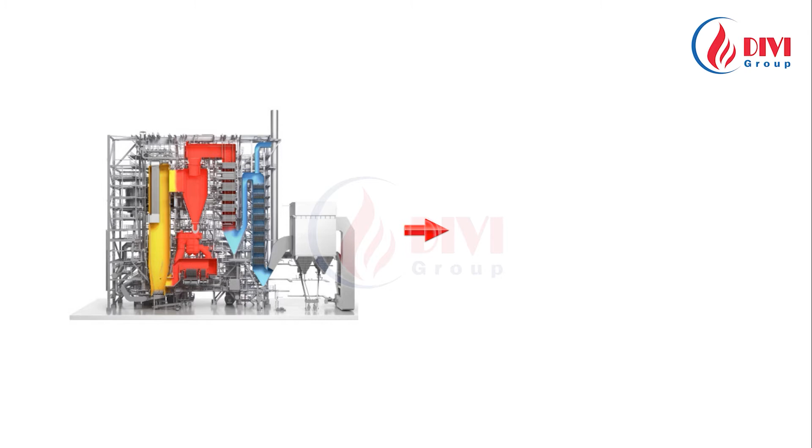Therefore, choosing the right fuel and appropriate combustion technology will help us not only optimize the cost of steam production, but also ensure environmental standards. Peace of mind for production. About the former, we'll talk about choosing the right fuel in Vietnam.

In Vietnam, there are many popular fuels, such as diesel oil, gas, coal. These are fuels that you can easily find anywhere in Vietnam, but they are classified as high-cost fuels in Vietnam. As we all know, up to 3/4 of Vietnam's territory is mountainous, stretching from the north to the south, and a very large part of the area is currently being planted with industrial crops such as rubber trees, indigo trees, eucalyptus trees. The main purpose is to supply wood for the wood processing industry.

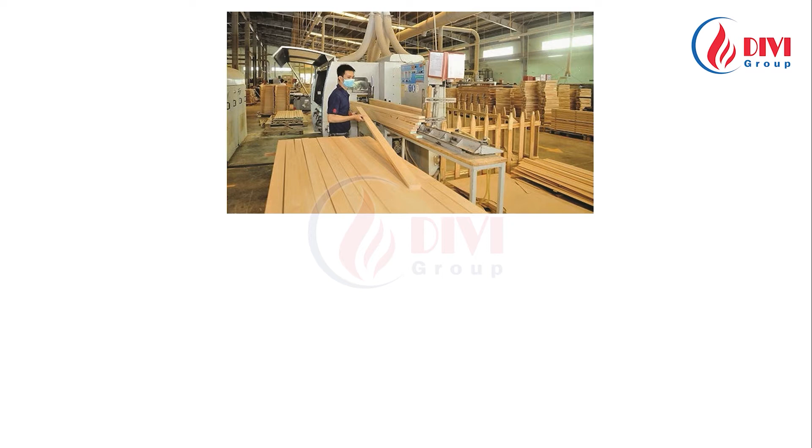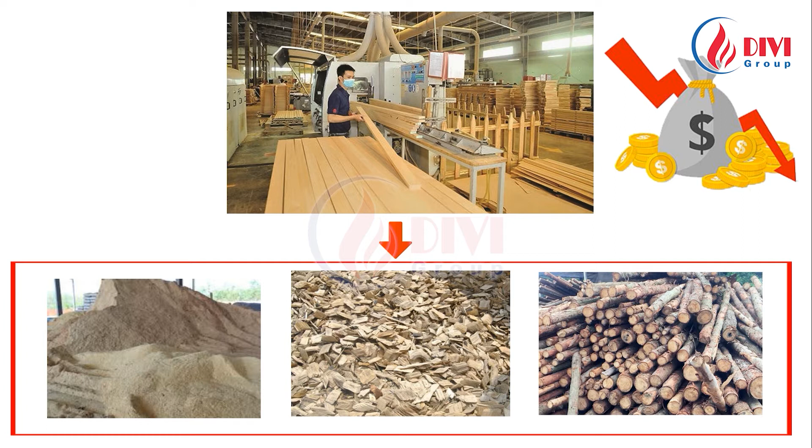Therefore, there are various types of waste products from this wood processing industry, such as sawdust, chopped wood chips, tree branches. Currently, the supply of these three fuels mentioned above is very cheap and easy to buy in all regions. Moreover, in Vietnam, some regions also have their own specific fuels as follows.

For the western region, including 13 provinces, the supply of crushed rice husks, rice husk firewood, and rice husk pellets is abundant, but the price varies by season. In the western provinces, it is possible to use a backup fuel source, which is imported coal from Indonesia, which is also quite cheap, and you can use it at times when the price of rice husk fuel is high.

For the south, including Ho Chi Minh, Dong Nai, Binh Duong, Binh Phuoc, Tay Ninh, Ba Ria Vung Tau, Binh Thuan, there are many fuel sources with very large output and very cheap prices as follows: chopped wood chips, sawdust, crushed rice husk, cashew nut residue, firewood, rice husk firewood, and coal fuel imported from Indonesia.

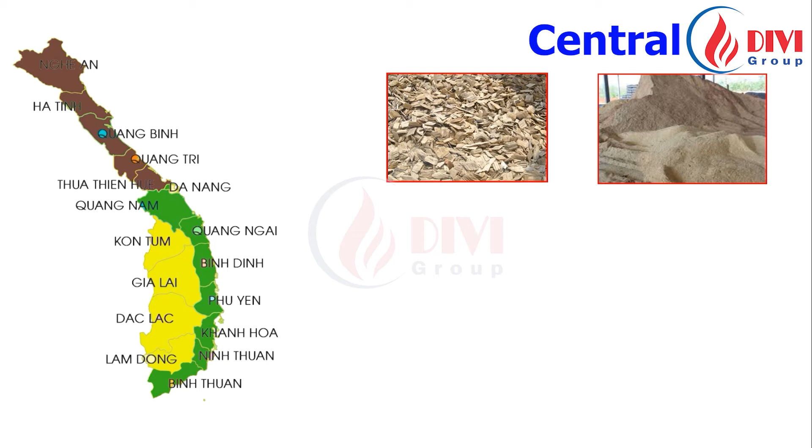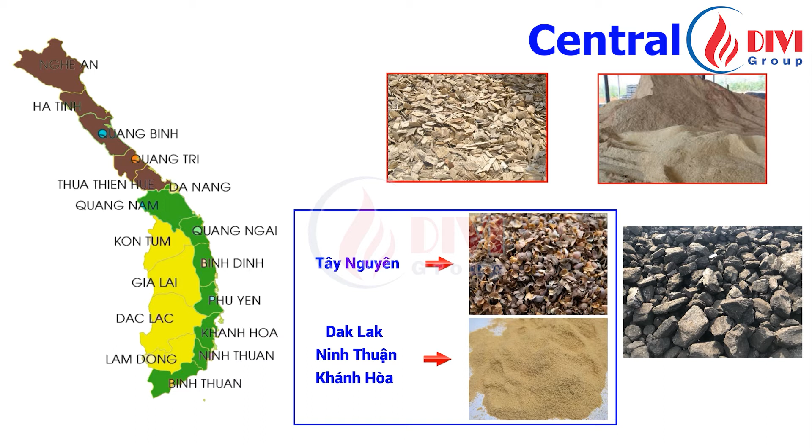For the central region, the fuel sources of chopped wood chips and sawdust are the two main fuels with abundant reserves and low unit prices. There are also some typical fuel types as follows. The Central Highlands region has an additional fuel source, which is coffee husks. Dak Lak, Ninh Thuan, and Khanh Hoa have crushed rice husks as other fuel sources. In the central region, there are sources of coal fuel imported from Indonesia that are transported from ports in the southern region, but they have a slightly higher cost than the southern region.

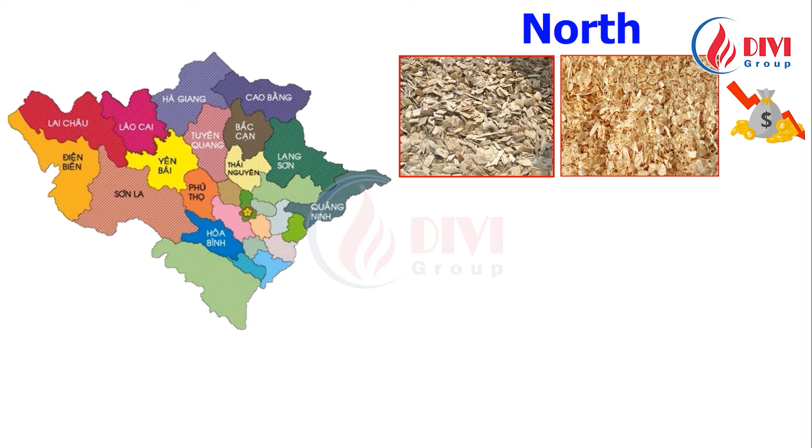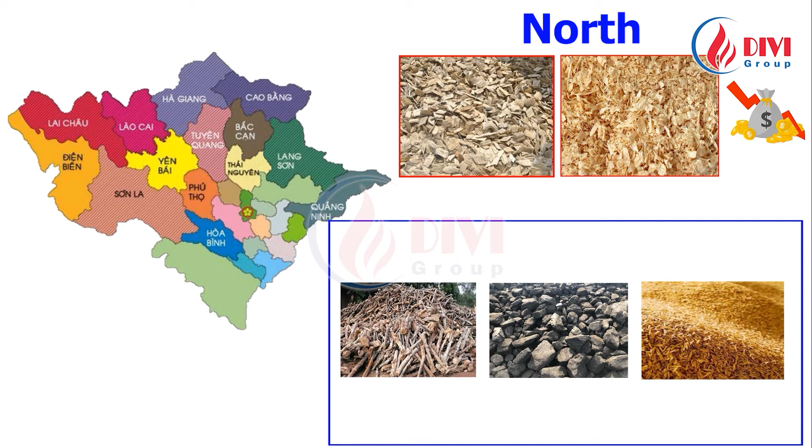For the north, in addition to fuels such as chopped wood chips and sawdust in large quantities and cheap units, this area also has quite popular fuel sources such as firewood, coal imported from Indonesia, and rice husks found in some provinces of the Red River Delta, such as Thai Binh, Hai Phong, Nam Dinh, Ninh Binh, but the quantity is small due to not focusing on cultivation in this area.

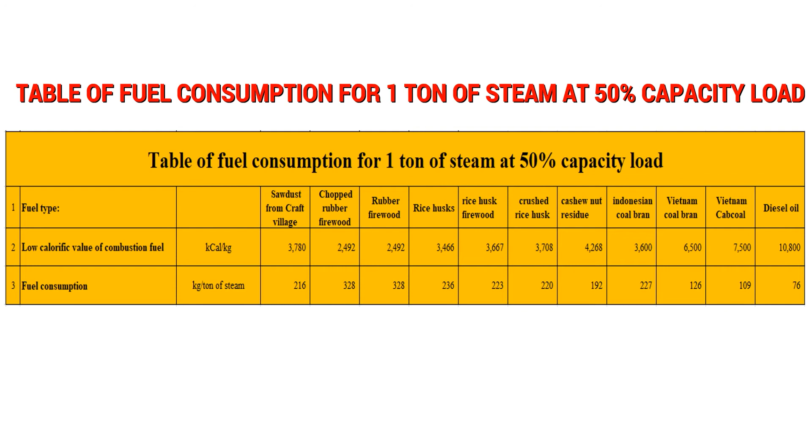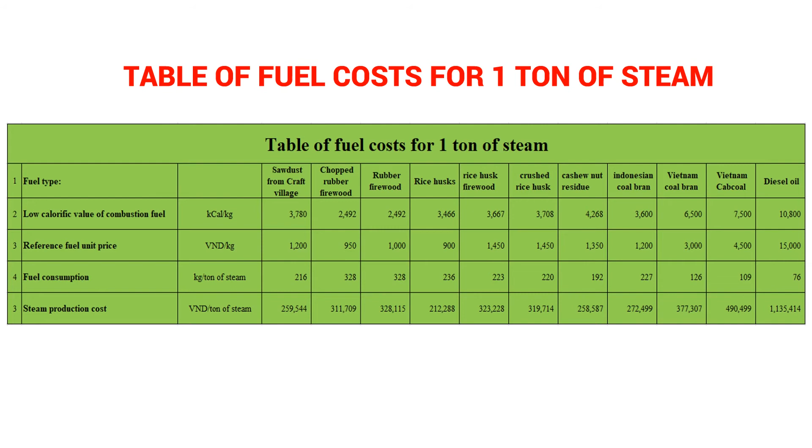But based on the above two factors alone, we still cannot conclude which fuel can create the lowest steam production cost for customers. To make an accurate assessment, please take a look at the table of fuel costs to produce 1 ton of steam as follows. To avoid confusion, we'll take a close look at the indicators based on the chart for visualization.

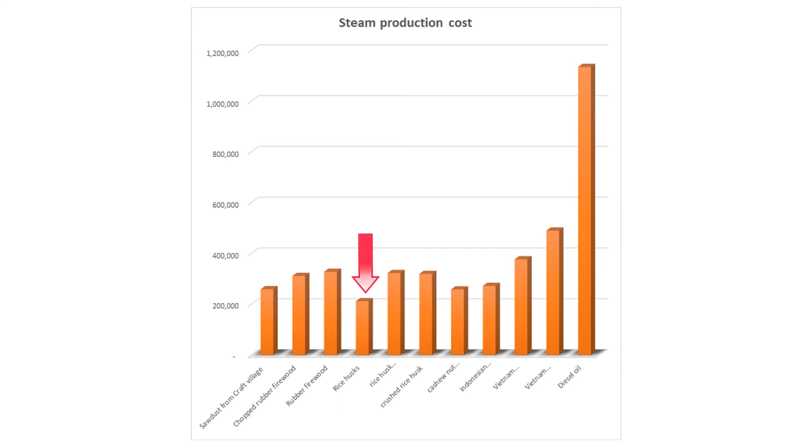We find that there are 8 types of fuels that can help us have relatively low production costs of steam as follows: Craft Village sawdust, rubber wood chips, rubber wood, rice husks, rice husk firewood, crushed rice husks, cashew residues, and Indonesian coal bran. Therefore, if you're investing in a factory in any part of Vietnam, you can choose a fuel like in our analysis above, which will certainly give you a sustainable cost of steam production when investing in Vietnam.

We have identified fuel types with low steam production costs in Vietnam. Now we'll go into the selection of suitable combustion technology for these fuels to ensure the environmental standards regulated in Vietnam. About the latter, choose the right technology. As we have seen, fuels with low steam production costs are fuels with low calorific value, according to the world's experience for hundreds of years.

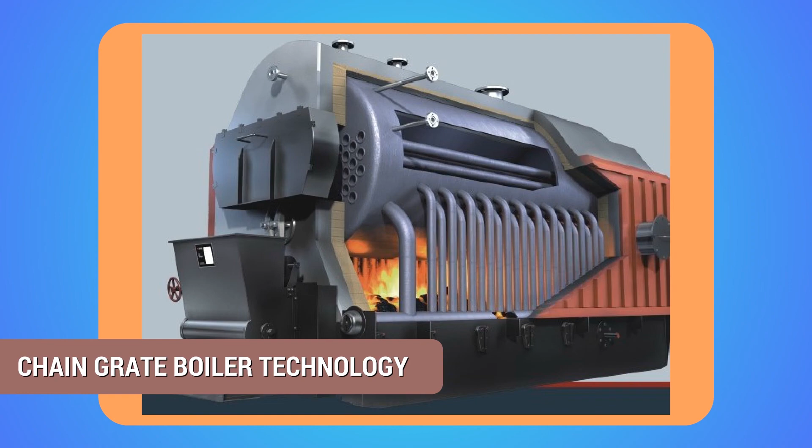To burn fuels with low calorific value, fluidized bed boiler technology is the most optimal choice to ensure fuel combustion efficiency and ensure environmental issues. Fluidized bed boiler technology in Vietnam is also quite common and is completely controlled domestic technology. In addition, there's the chain grate boiler technology that can also burn some of the above fuels, but the requirements for input fuel quality must be higher as follows.

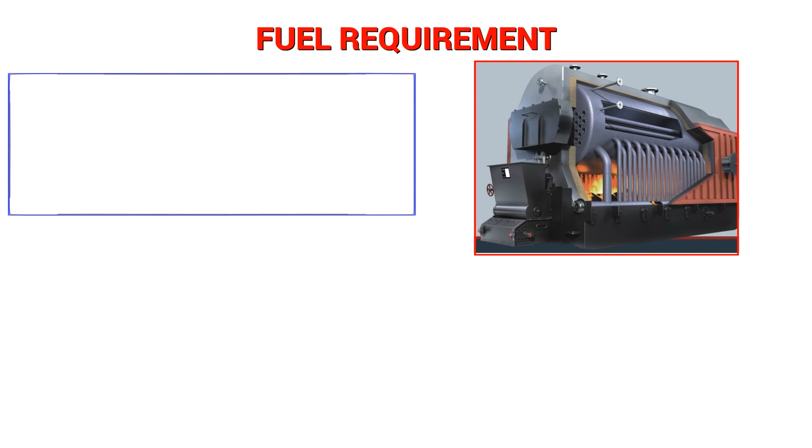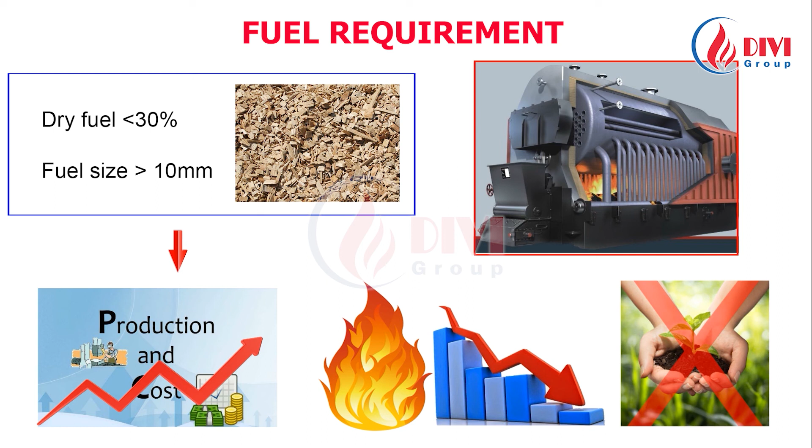The fuel must be dried to a moisture content of less than 30%. The fuel particle size should not be less than 10 millimeters. These are two qualities that cause the fuel unit price to increase, leading to an increase in production costs. If these conditions are not ensured, the fuel combustion efficiency of the chain grate boiler is not high enough and does not fully meet the environmental standards according to current Vietnamese regulations.

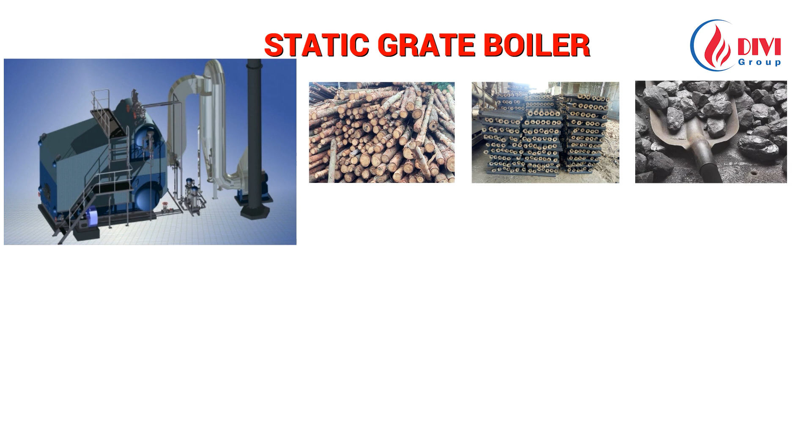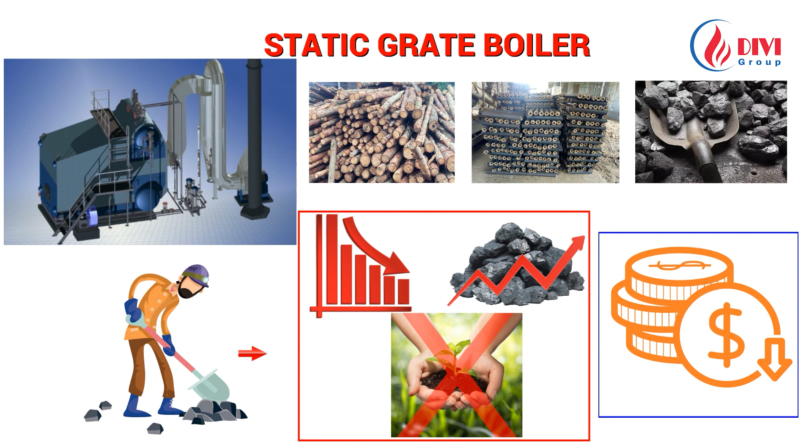Besides, we also have the static grate boiler. This type of boiler is suitable for burning large-sized fuels such as wood, rice husk wood, large coal. The process of supplying fuel to the boiler is carried out manually, so it depends quite a bit on the operator. This leads to relatively low efficiency, high fuel consumption, and unstable environmental standards when using a static grate boiler. But the advantage of the static grate boiler is lower investment cost than fluidized bed boiler and chain grate boiler.

Thus, fluidized bed boiler technology is the most reasonable solution if you want to make a new investment or replace the boiler in Vietnam.

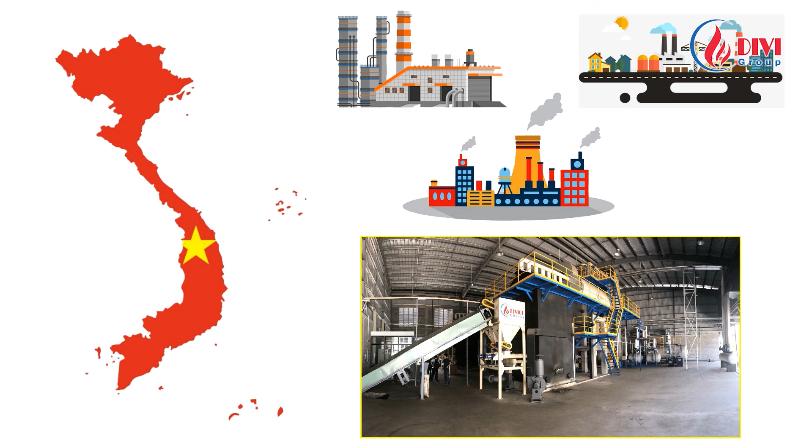Above is our basic advice for you to have an optimal option when investing in a factory in Vietnam to get the lowest production cost while still ensuring current Vietnamese environmental standards.